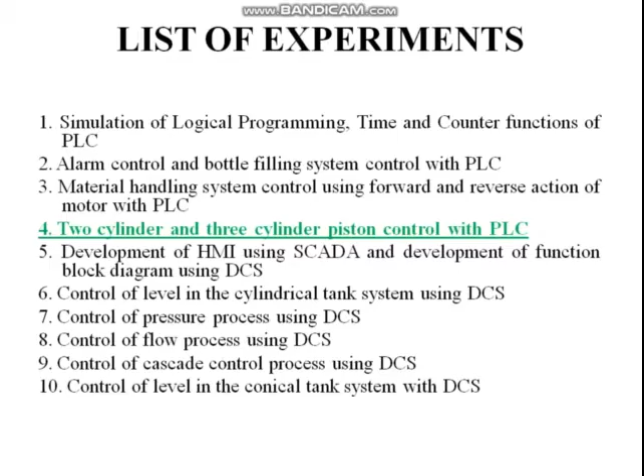Good morning everyone. In today's session, we are going to discuss 2-cylinder and 3-cylinder piston position control using PLC. So this is our topic.

So our aim is to study 2-cylinder and 3-cylinder piston control using PLC.

As we know, we are in need of certain apparatus. The major apparatus required to conduct these experiments are namely the software which we are using, Versa Pro, and also the pneumatic stamping system. This system consists of all the required components to control your stamping over the given unit, and also the required number of patch cords.

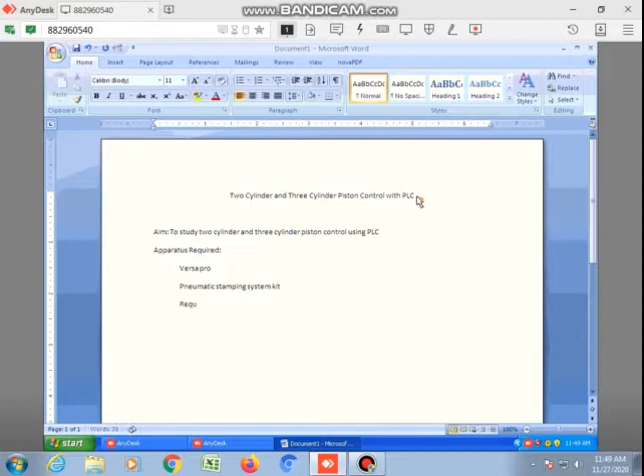So here let us list our input and output first. The inputs are, we need to sense our material. Let me explain the basic system first, the hardware components related to the pneumatic stamping system, and then we can list the same.

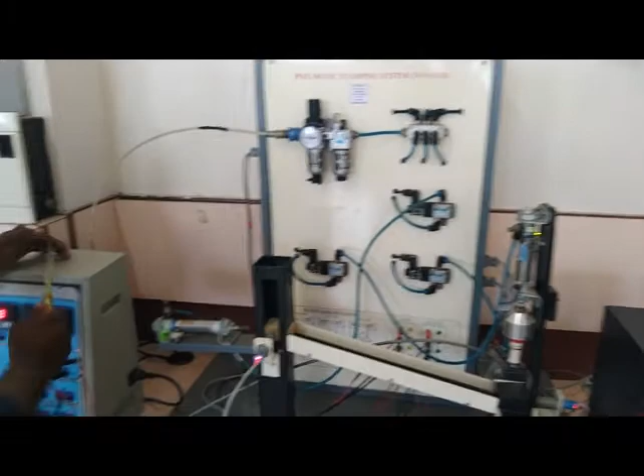So this is our pneumatic stamping system which we are going to connect with our PLC. We discussed about the PLC training kit in experiment 1 as well as 2. The same trainer kit we are going to utilize to control our pneumatic stamping system. This system consists of certain components. Let me tell you the various components.

This is our pressure unit, where we can control the pressure so that through it you can activate our pneumatic switches. This switch converts the electrical pulse into pneumatic pressure, which we feed into our cylinders.

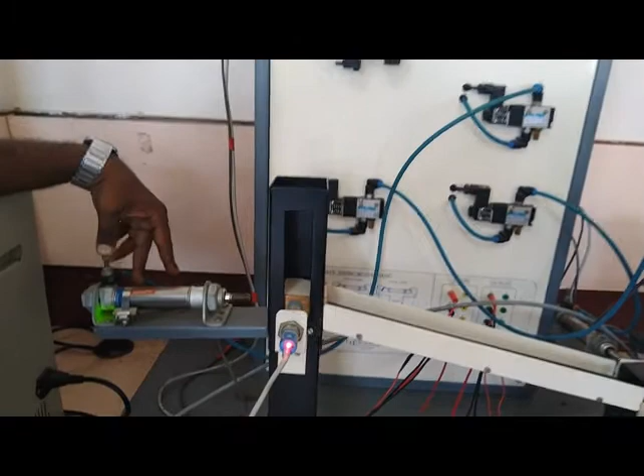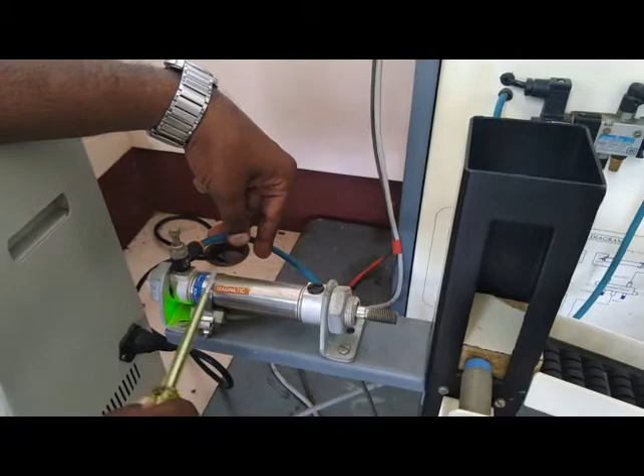This cylinder is a single acting cylinder, though you can have it as a double acting cylinder as well. Right now we are having it as a single acting cylinder. When you provide pressure from this end, the stamping gets activated, making this cylinder active. For example, let me provide the pressure for this particular cylinder.

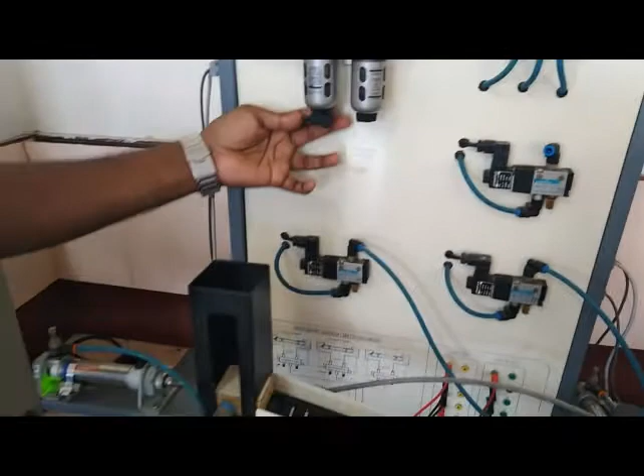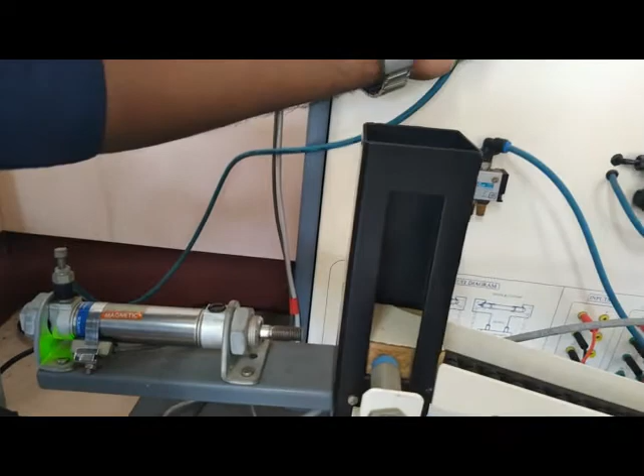I would like to take this, and you see here the pressure coming out of this cylinder. So the pressure I provide for this particular cylinder activates it, when I provide pressure the cylinder gets activated. So this is a single acting cylinder, and this pressure we are controlling through the switch.

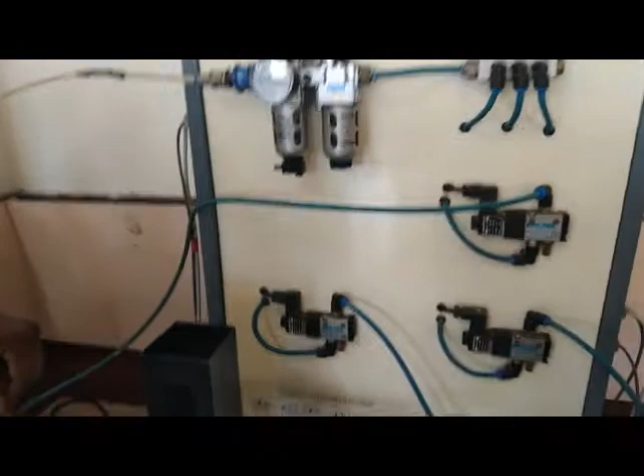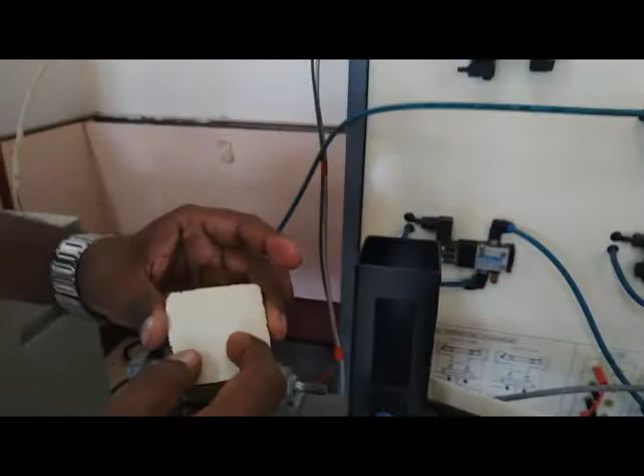Similarly, we have 3 cylinders, namely cylinder 1, cylinder 2, cylinder 3. The first cylinder will help us get the material from the reservoir tank. Let us consider this as a reservoir tank where we have our material, in which we are going to stamp the date, manufacturing unit and other components as needed.

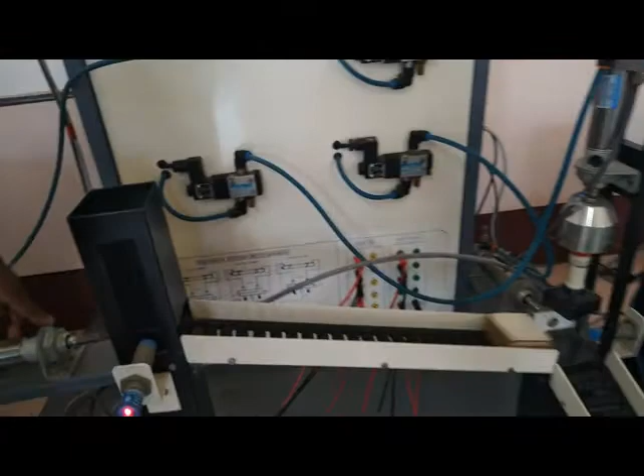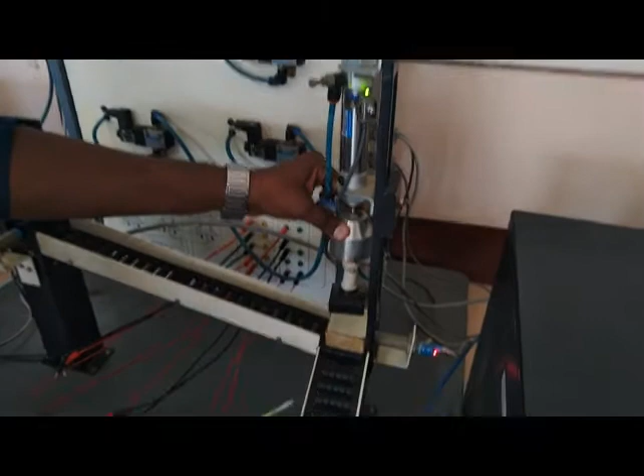We are going to stack our entire materials over our reservoir tank. The materials get pushed to the stamping position, traveling along the conveyor until it reaches the second position, where the second cylinder gets activated. When activated, the stamping unit stamps the information over your product. Immediately after that, it is stored in our reservoir tank. By the time you activate the third cylinder, it pushes our material to the reservoir tank.

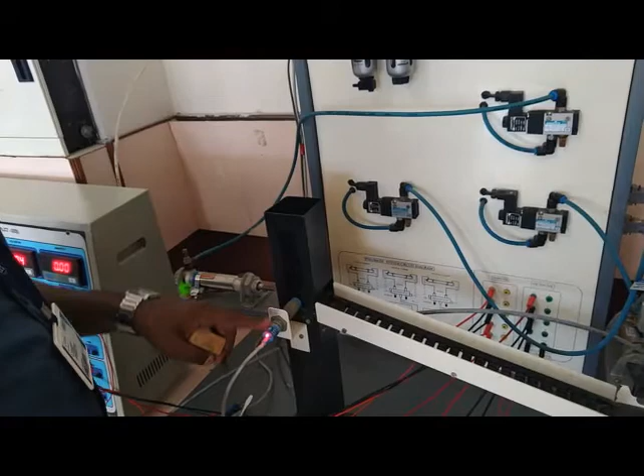This is what the system we are going to control. Through this, we have a proximity sensor to detect our material. This is a non-metallic system which can be detected through a capacitive type proximity sensor. This capacitive sensor will sense your material, and also the position of your cylinder can be sensed by the inductive switch here. This will sense the position of your cylinder.

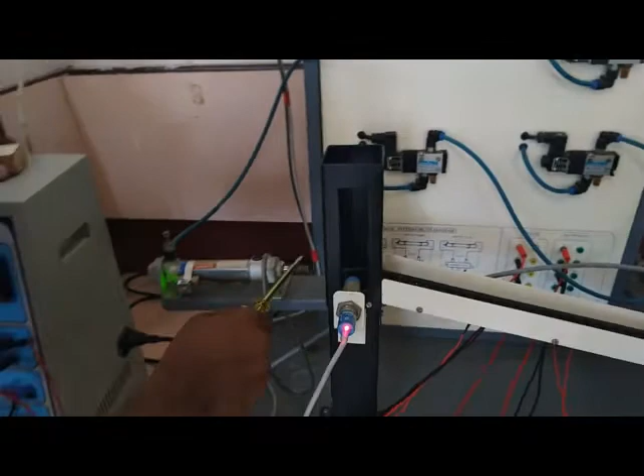If your cylinder is at initial position, the proximity sensor will sense your cylinder. If the position is away, the sensor goes deactivated, which helps you detect whether the cylinder is in its initial position or not. When I sense the material, and also when the cylinder is in its initial position, you can activate this. When activated, immediately the material gets pushed to my second position. Let me push it manually like this.

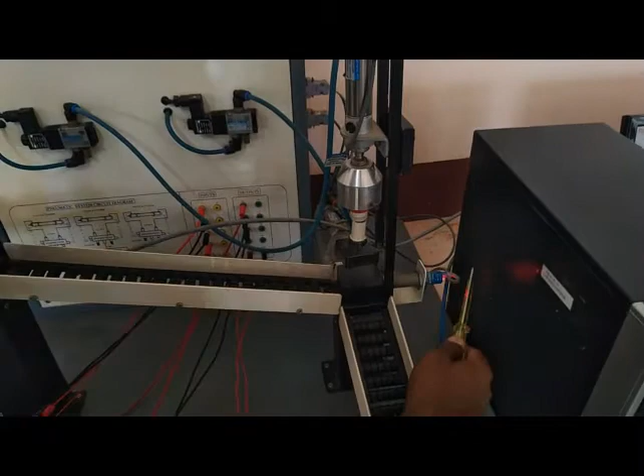Similarly here, whether the material is available or not can be sensed through the second capacitive sensor. The capacitive proximity sensor will help us detect the material in position 2.

Similarly, the second cylinder position is also detected, and the third cylinder position will be sensed by the third proximity sensor. So when my second capacitive sensor is active, as well as the initial position of my cylinder, these two sensors being active means the material is available and we need to stamp it. Immediately you activate this by enabling the pneumatic switch, which will activate the stamping. Then within a few seconds you take it to the reservoir tank by activating the third cylinder.

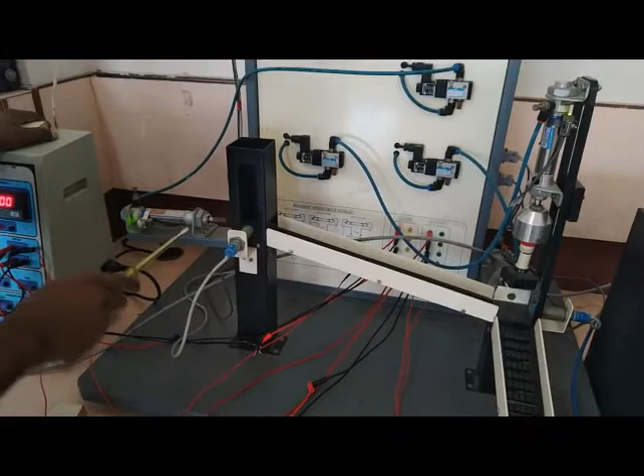So on the whole, we have certain inputs and outputs. Let us consider capacitive proximity sensors 1 and 2 - we have two sensors. Similarly, the cylinder positions are to be sensed: cylinder position 1, 2, and 3. So we have two capacitive proximity sensors and three inductive proximity sensors for cylinder positions 1, 2, 3. On the whole, we have 5 sensors.

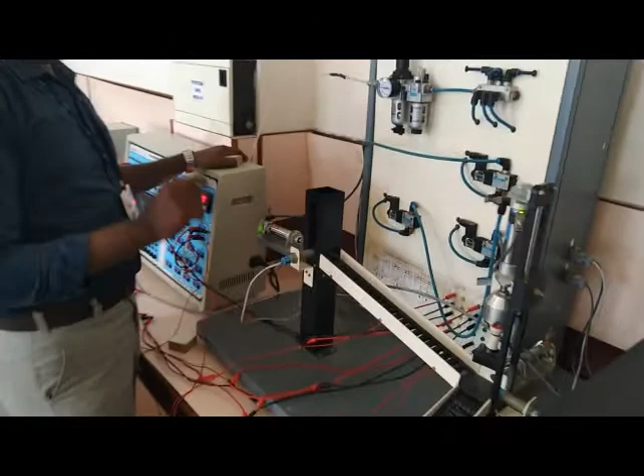These are all going to be digital inputs. Similarly, the outputs are - we need to activate cylinder 1, cylinder 2, cylinder 3 sequentially. To activate this, we need to apply pressure, distributed into 3 different lines. We could distribute into 6 lines, but since we only have 3 cylinders, we distribute into 3 lines.

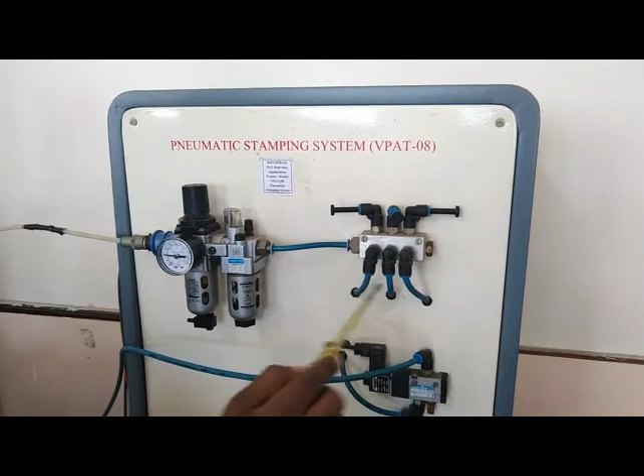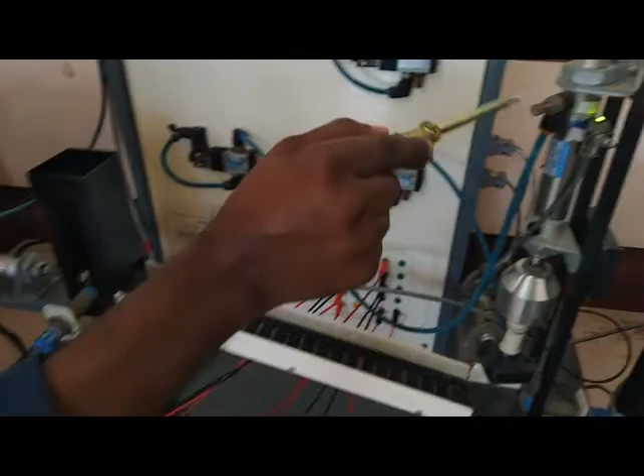So these 3 lines are connected to an input point of the pneumatic switches, and the outputs are taken to the cylinders. When I activate switch 1, it provides pressure to cylinder 1, activating it. When I activate switch 2, it provides pressure to my stamping cylinder. Similarly, switch 3 activates pushing towards the reservoir tank. So these 3 switches are the output components - we need to provide a digital output for these 3 to activate pressure towards the cylinders.

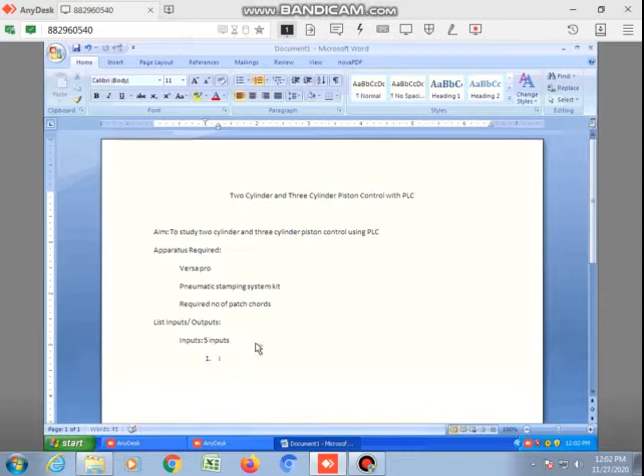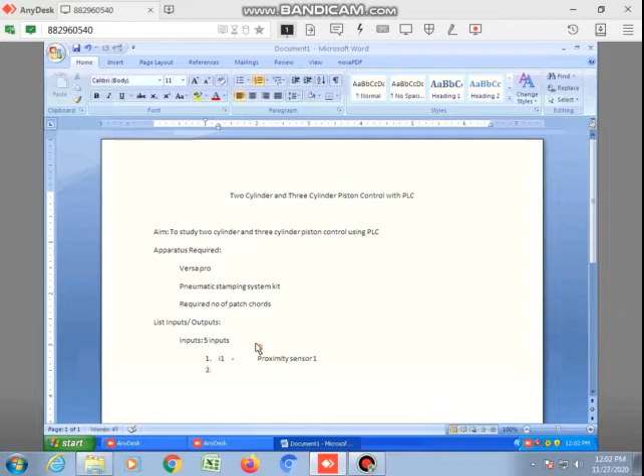So as we discussed, our pneumatic stamping system has 5 inputs. Let me name the first input as I1, which represents our proximity sensor 1. The I2 represents proximity sensor 2. Proximity sensor 1 senses the material in the storage tank or initial position, and this one senses the material in the stamping position.

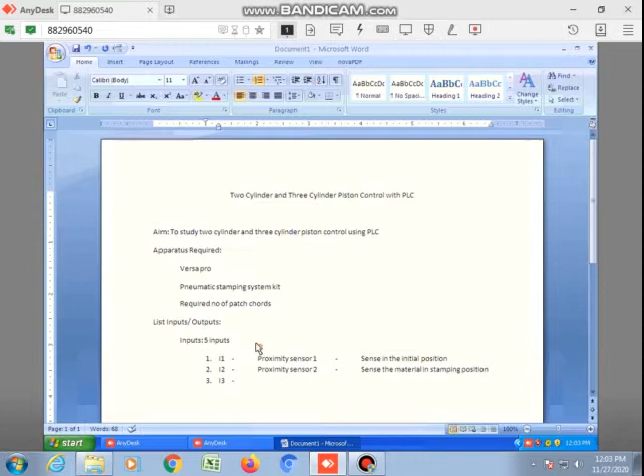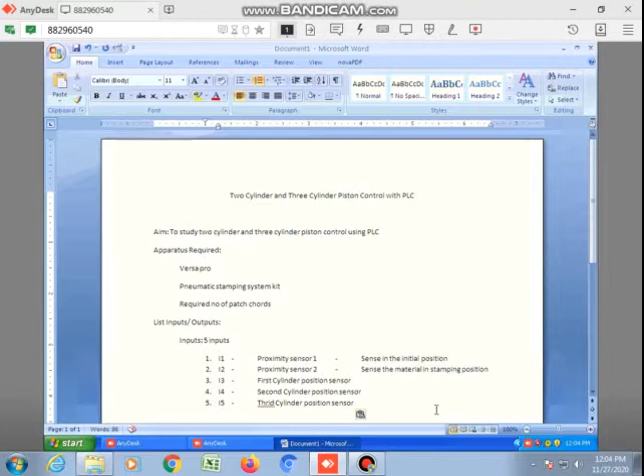Similarly, we have three other inputs, namely I3, which is the first cylinder position sensor, sensing whether the cylinder is in its initial position - it senses only the location of the cylinder shaft. Similarly, I4 is for the second cylinder, and I5 is for the third cylinder. So these are all 5 different inputs.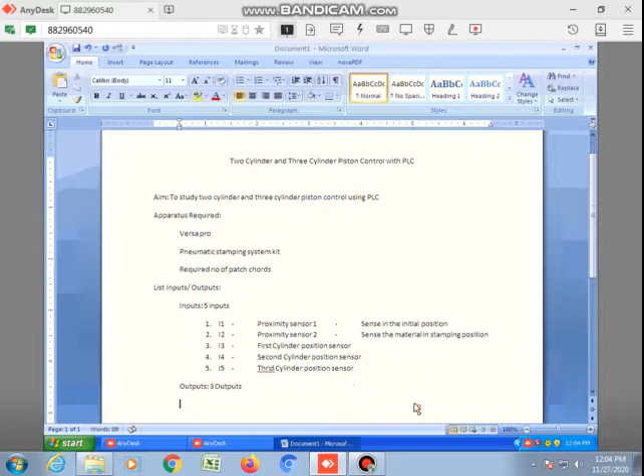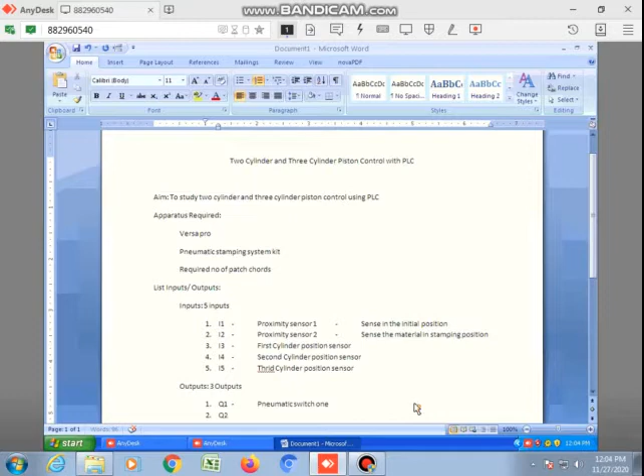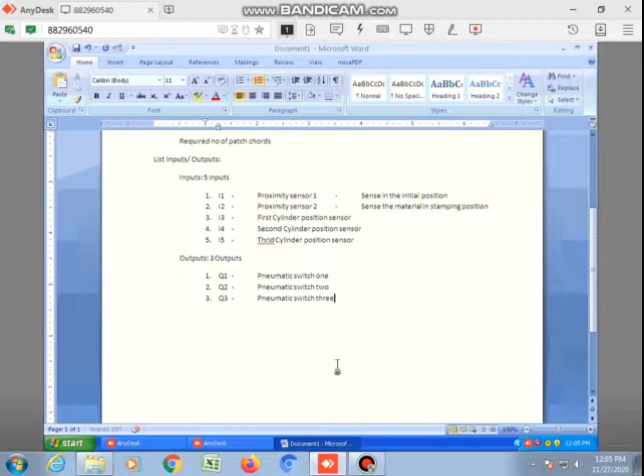Similarly, the outputs - we have 3 outputs, namely Q1, Q2, Q3. Q1 represents cylinder switch 1, pneumatic switch 1. My second output is pneumatic switch 2. And the last one, Q3, is also a pneumatic switch, switch 3. So we have 5 inputs and 3 outputs.

Based on the sequence, we need to develop a program. Let us go into our programming. As discussed, we go to VersaPro to connect with the GE Fanuc. In this VersaPro, we need to make a new folder - let me name it Venkatesan Pneumatic. Let us finish it.

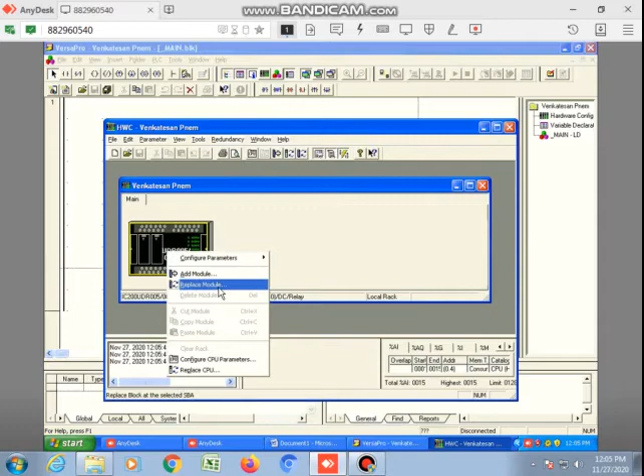Here you have an empty file, and you need to control the hardware configuration. Change your module to the one available - UDR005, which we know is the micro PLC with 23 point AC and DC components. Have this and change your configuration. You just need to disable the password alone, since it will trouble the next user. Directly change the configuration, save it and close it.

So we need to develop our program. Let us go in sequence. Whenever I find the material in the tank, I'm supposed to push it to position 2 where we can stamp the material. So when I find the material in position 1, the starting position, my proximity sensor will be active, and to push it, my cylinder should be in its initial position.

So these two conditions I'm supposed to check, right? That will activate my pneumatic switch 1. Based on the addressing, let us check how the addressing will be. Look here, the addressings are: proximity sensor 1 sensed, which means I1. So here it's supposed to be %I1.

When it is sensed, also when your first cylinder is in its position, which means I3, when these two are sensed together, what should I do? %I3, when these two are sensed together, I need to activate my output 1, that is pneumatic switch 1. So %Q1.

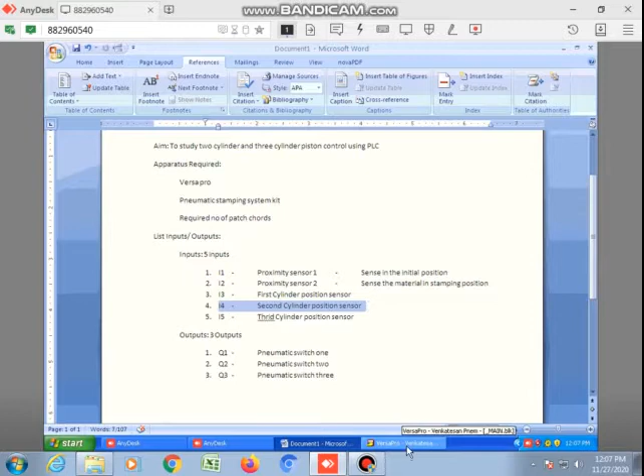Similarly, after this, when output 1 gets activated, the material will be pushed to the second position where we are stamping. So when the material is in stamping position, your proximity sensor 2 should be active, also the position of your second cylinder should be in its initial position, which means I2 along with I4 should be active to activate your second cylinder switch, that is %Q2, which means I2 and I4 are going to control my Q2.

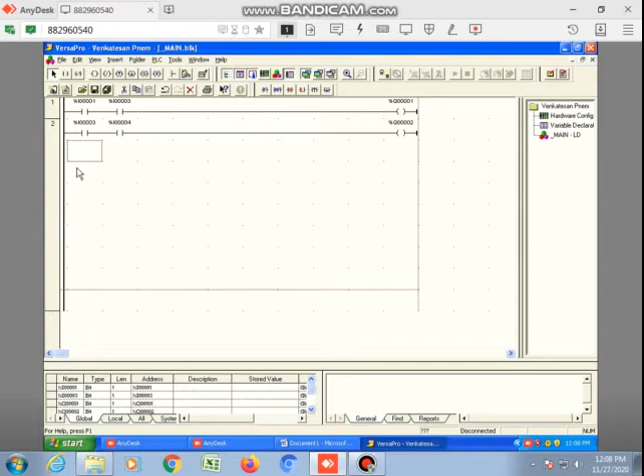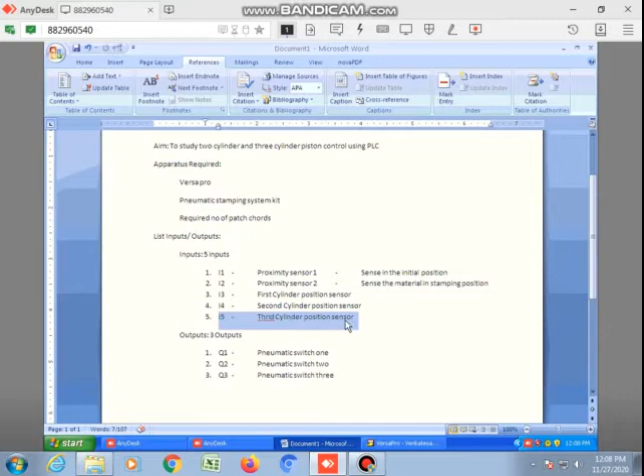Lastly, after stamping, I should push it to the storage tank or the reservoir tank or the end tank, where that will be controlled like your third cylinder position should be in its initial condition. Also your proximity sensor should be sensed, which means the material is in stamping position. So my third cylinder position as well as the proximity sensor should control my third cylinder switch, that is Q3.

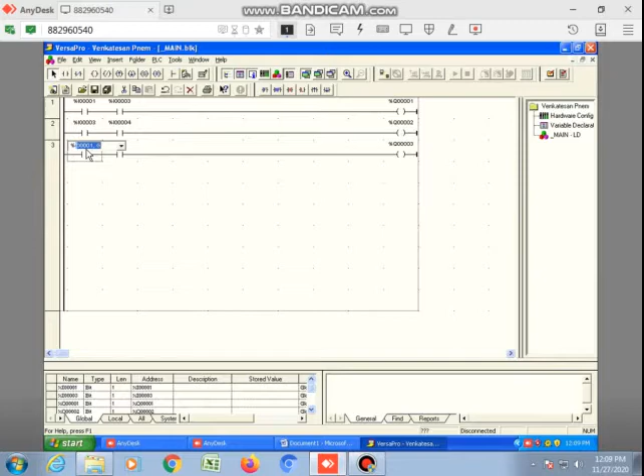Which means %I3, that is %I2, that is %I2, which is a proximity sensor, and this is going to be %I5, which is cylinder position 2, and this is not 3, this is also 2. Sorry for the mistake. Proximity sensor as well as cylinder positions will control over Q3 and Q2.

Now you see all these things are happening in parallel. Since the scanning time is very low, they may all get activated together. To control over your process, you should fix your timer here to keep your sequence by delaying one from another. Since all these processes will happen together within nanoseconds, I need to control the sequence by providing a delay among each and every step. So to make delay, I'm supposed to provide a timer, that is an on-delay timer.

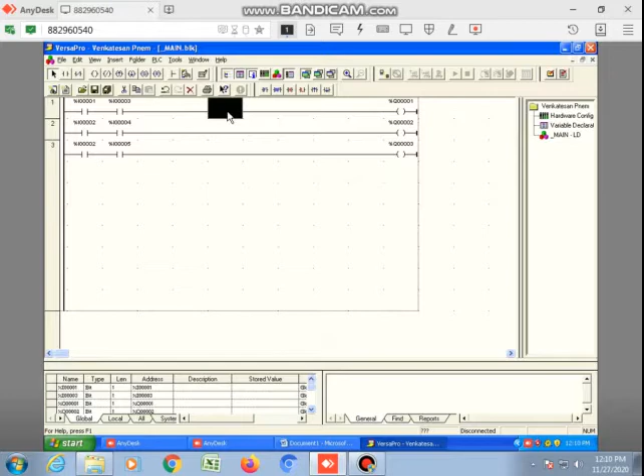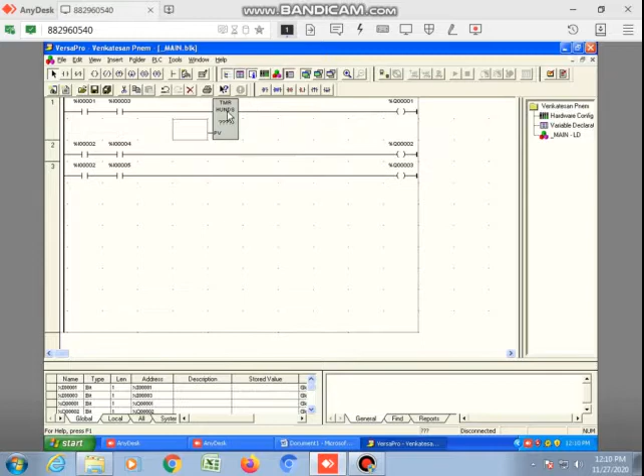Click here, press enter, which will ask for the function you want to insert. So here I need to activate an on-delay timer. So type TMR timer HUNDS, and you have studied about the timer in your PLC theory class. Let me enter 100, since if I provide 100 pulse, which means 1 second. If I provide 200, which means 2 seconds. So I would like to provide 2 seconds delay to activate my Q1.

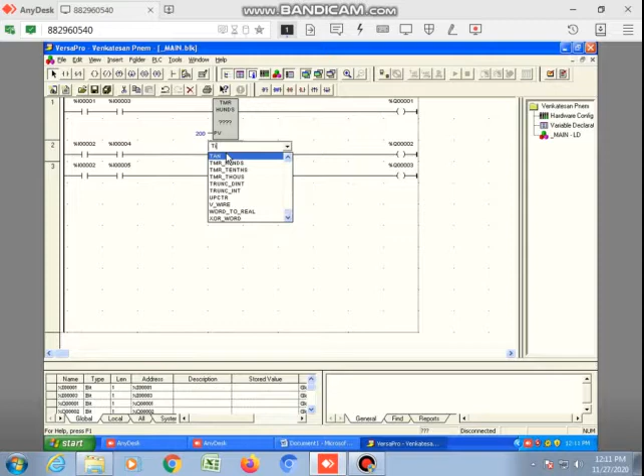Similarly, I'm supposed to provide delay for my second output as well. So here, press enter, timer TMR HUNDS again, and the last one also should be provided with a delay. So press enter, timer HUNDS. So we have 3 different timers.

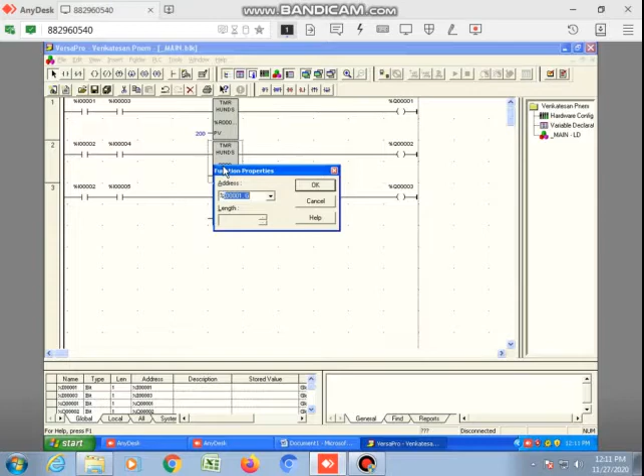So the first timer requires memory. Double click on this, give the register as %R1. Similarly, the second register timer needs a memory which is %R2, and this is %R3, the third register timer. You see the input 1 is controlled over.

So as per our program, output 1 is controlled by your input 1, that is the proximity sensor, and I3, that is the cylinder position, first cylinder position. Similarly, output 2 is controlled by your proximity sensor 2 and second cylinder position. Output 3 is controlled once again by the proximity sensor and also the cylinder position, that is third cylinder position. So here you see the first output and second output may be activated together.

The material will be traveling from one point to another, meanwhile the next material will be stamped. So the process may get interfered. To avoid these two processes from being activated together, we have to go for interlock. So let us provide that interlock here. Instead of providing an interlock by using your output, when your second proximity sensor is sensed, you should not activate your first one. Unless the process gets completed, you should not pass on another material to that process.

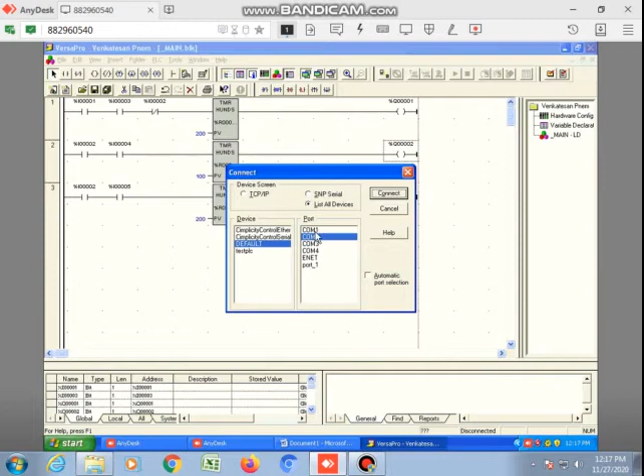Let us download the same to our PLC. Connect with your PLC, which is connected to COM port 2 as we do in our program. I am using the same computers. So in the same COM port 2, the PLC is connected, and let me clear the program which is already existing over there. So clear all the information, clear all. After clearing, let us store our program. Since I am storing it for the first time, I would like to store it along with other components like hardware configuration and other things. Store it.

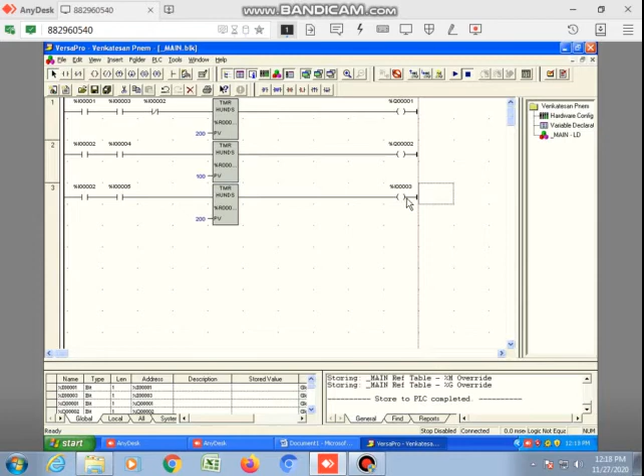The storing will be successfully done if there are no errors in your program. If there is an error, you will get a pop-up window here. You can read the error, and based on the error you can change your program. Let me try the same. I am going to put I instead of Q in the coil, that is at the output end. Let me try to store the same. If I try to store it, you see there will be an error. Store to PLC is not complete because I have 0 warnings, but I have 1 error.

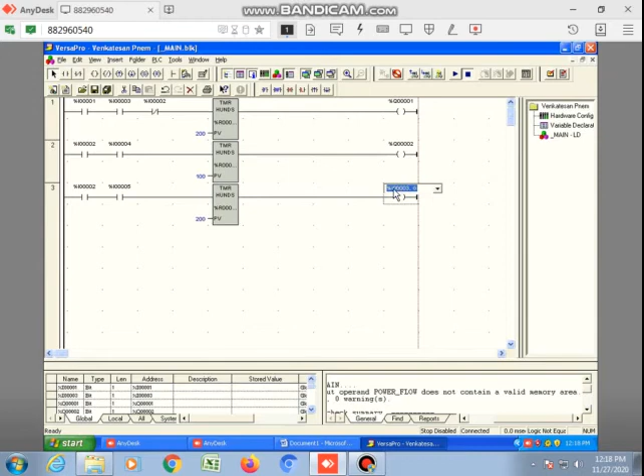Check the error. The error is at the output operand: power flow does not contain a valid memory area. In the sense the memory cannot be I. I was supposed to provide Q. This is the understanding. Now you try to store it. You store it, you will get no error, and the storing will start. The storing is also completed. You can load if you wish. I would like to load only the program for our understanding. The loading is also done.

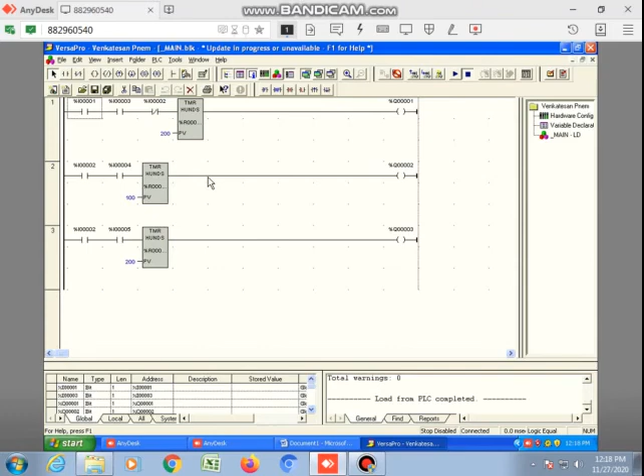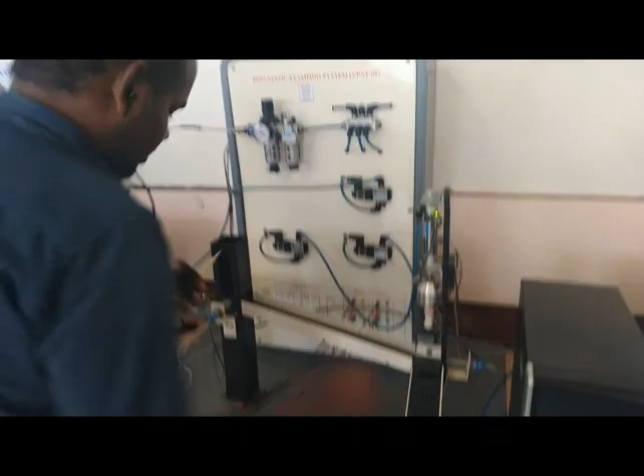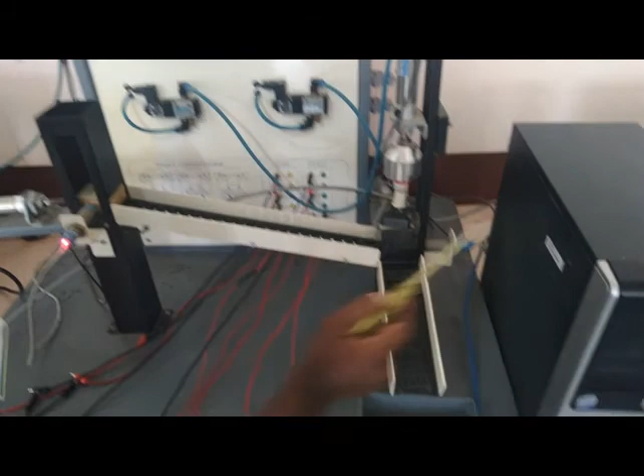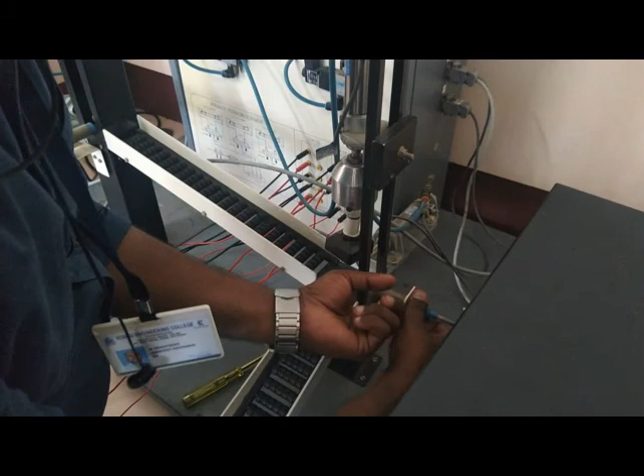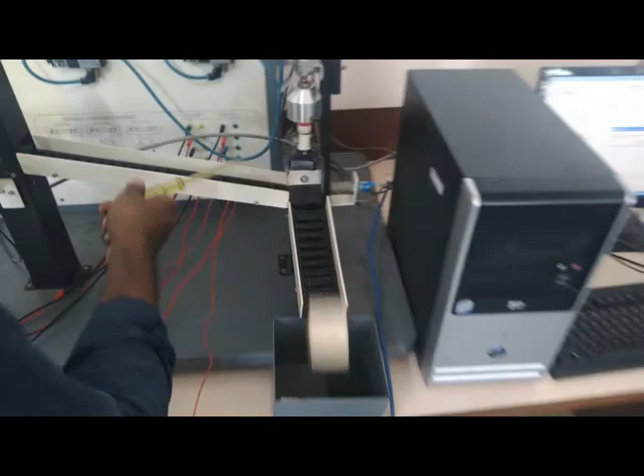due to the sensitivity of this particular sensor, the material is not properly sensed. So you can adjust the material a little bit closer so that it can be easily sensed. So adjust the material. Let me place it in the storage rack. Pushed over there, protected, stamped. So this is our pneumatic stamping system.

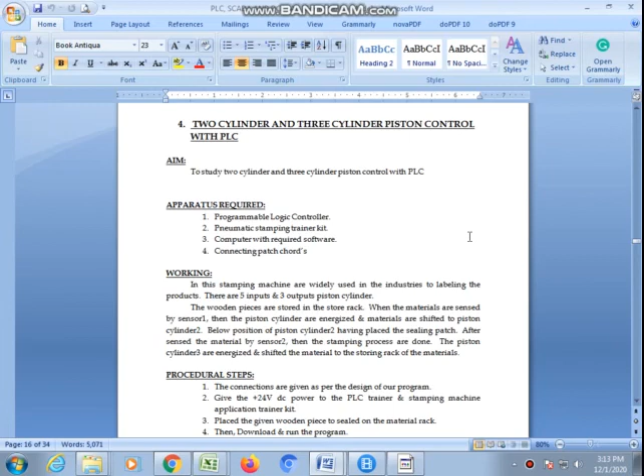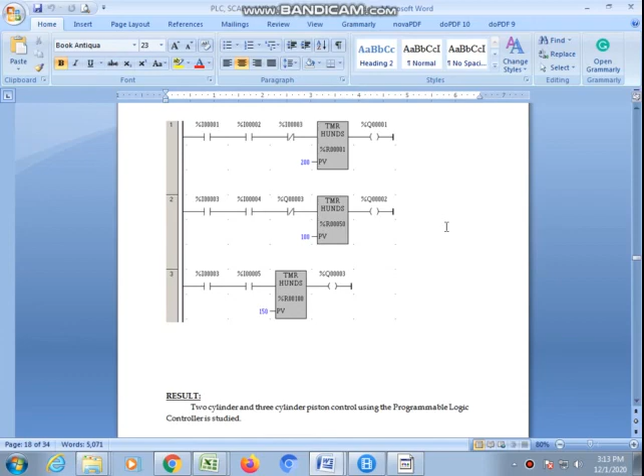Thank you so much. So this is the document we need to submit for the fourth experiment, 2-cylinder and 3-cylinder piston control system. So we have the pneumatic kit and we have this program. This program is already explained. So you need to make this program in PicoSoft and you have to submit it in place of this GE Fanuc based program, and you can submit the document in PDF.